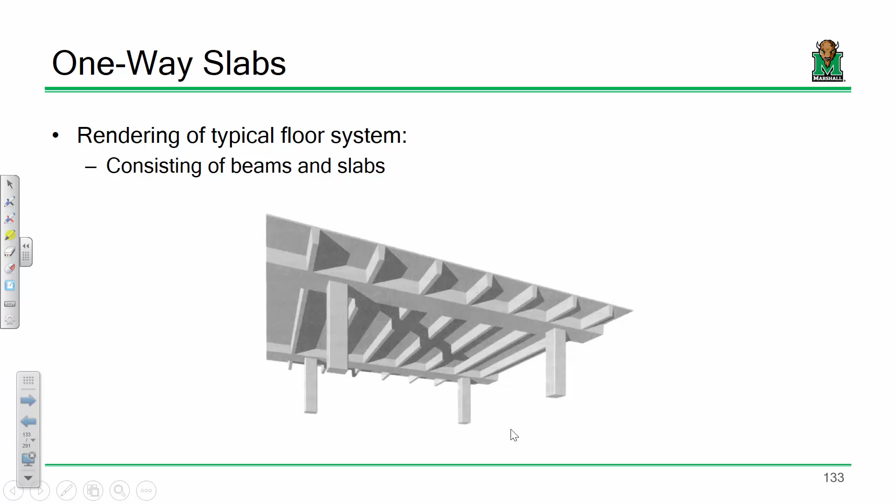Now, I'm sure a question that comes up is, why are you using the word one-way? What do you mean by one-way slab? Well, the slabs we're going to be designing in this class are one-way slabs because they're designed or intended to bend in one direction, that they bend one way. This image here on top would be a perfect example of the assumptions we make for a one-way slab, so it's bending just in this one direction. That's a pretty conservative assumption for design purposes, and that's what a one-way slab is.

A two-way slab bends differently, the mental image I get whenever I think of a two-way slab is almost like how a trampoline would bend, how it kind of bends this way and that way. So you have that bending going on in both directions.

Now, there are advantages to using two-way slabs. Because you're transferring the load in 2 directions as opposed to 1, what you find is that if you design a one-way slab, and I'm just making up these numbers to give you a scale, let's say you design a one-way slab and you find that slab needs to be 12 inches thick.

An equivalent two-way slab might be something like 8 inches thick. You might be able to shave some weight off of that slab, so there are benefits to using two-way slabs. The problem is that two-way slab design is trickier. First off, if you're getting analytical with it, the math gets way more complicated very quickly.

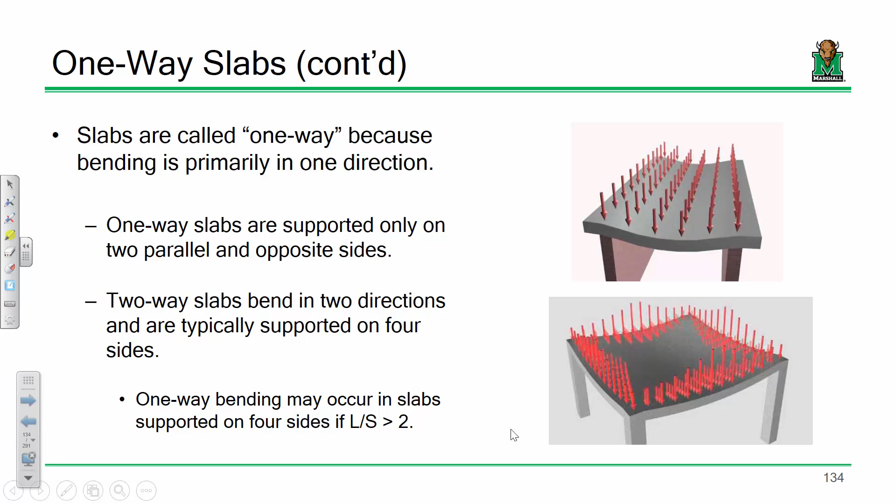This is one of those things where you need to learn how to walk before you can run. You need to learn how to do one-way slab design first before you can tackle more complex issues. So we're going to keep it simple and start with one-way slab design. The way you design a one-way slab is pretty straightforward. Keep in mind a slab is nothing more than a really flat beam that's supported on each end.

So what I've got here on the bottom is an image of a slab. Let's say that slab is sitting on a floor system. So this would be a beam, this would be a beam, and this is the slab on top of that. What we do for design purposes is cut out a small little strip, and for units we usually take a 1 foot wide strip.

We say let's do some math and analysis on this strip and figure out how much reinforcement we need inside it. Then whatever reinforcement we need there, we just repeat that pattern along the entirety of the slab. That's basically the long and short of how we do slab design. We design this little strip, and whatever reinforcement we get, we just repeat that everywhere.

Now there's a couple additional details you need to be aware of. One is that we're actually going to be providing reinforcement in two different directions. What I'm calling our main steel, the steel we're providing for structural purposes, is going to be designed just like we did in our previous example for a known cross-section. The temperature steel, going in the opposite direction, we place not really for structural purposes, but more to prevent cracking from things like day-to-day use, thermal effects, and shrinkage of your concrete.

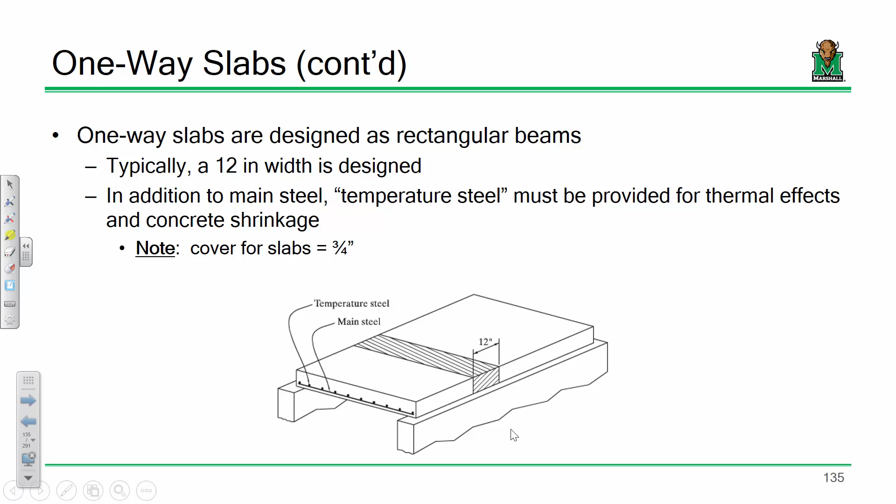Now, the reason we can design a one-way slab in pretty much the exact same fashion as a known cross-section beam is because you know the width, since the width is 12 inches - you're idealizing that 1 foot wide strip. As for the height, we're basically going to be taking the height from ACI minimum.

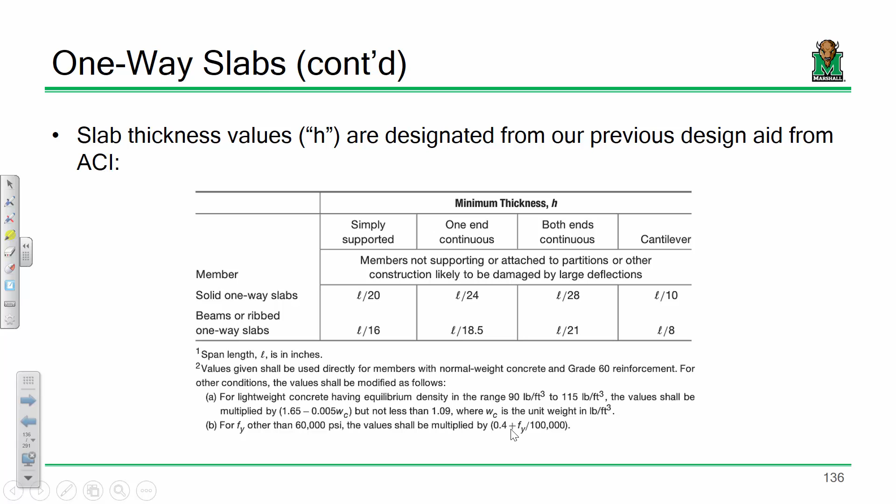You've actually seen this table before - we used it when estimating the weight of a reinforced concrete beam. For instance, if you have a simply supported beam, the minimum height is L/16. If you have a simply supported slab, the minimum height is L/20. That's how we determine the thickness. So if you've got the width and the thickness, you know what the beam looks like, so let's get to design. Here we go.

All right, so here's how you design a one-way slab. First off, we've got to determine the factored moments on the beam. I say beam because you know the width of that beam - it's 12 inches because you're assuming that strip. And the height is just the minimum height we're going to take from ACI. So that one's pretty straightforward.

Again, if you know what the beam looks like, you do not need to assume the self-weight of the beam, because you can determine that from a calculation. You can just calculate it out.

Another point worth mentioning: we are designing a slab here, not a beam. So what you'll find when you do the calcs is that your moments can actually be kind of small, because you're dealing with a really small element and the loads applied over a really small area.

When we did beams, we were getting bending moments like 400 foot-kips, 500 foot-kips. Here we're going to do an example where the bending moment is 5 foot-kips. That's normal for a slab, so don't think that's weird, okay? It's over a really small area. So 3 foot-kips, 4 foot-kips, 5 foot-kips, totally normal.

Next, we are going to assume a phi value and go through and do that. Then we calculate a rho for design purposes. Again, we're not using 0.18 FC prime over Fy, because you don't need to guess rho or pull a value out of thin air. If you know what the beam looks like, you can solve for what rho needs to be.

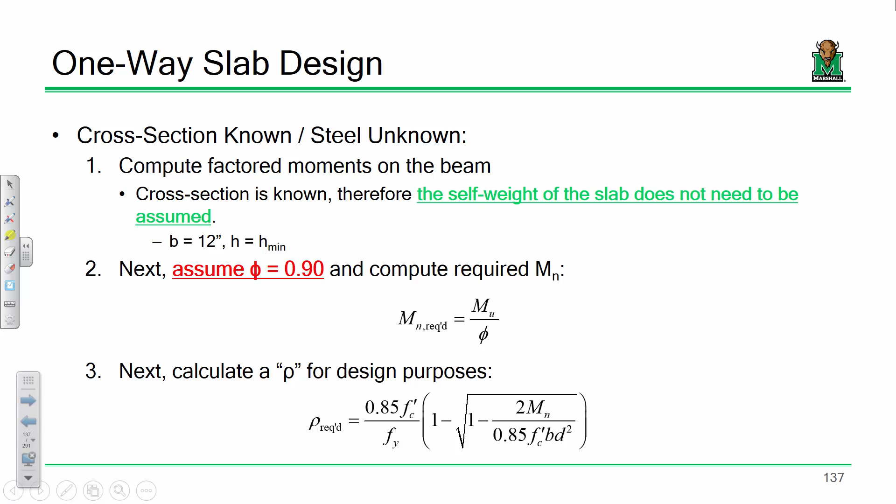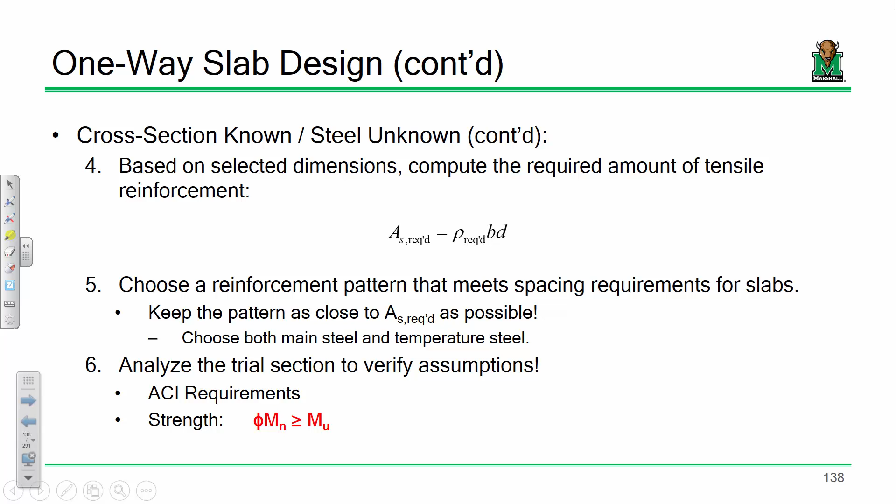Once you've got rho, BD will give you the area required for your steel, and then you choose a reinforcement pattern that meets spacing requirements for slabs, and we'll get to that in a second.

One of the other things I'll point out now - let me find it. If you haven't broken this out yet, I would go ahead and break this out. If you recall, I gave you a reinforced concrete beam design aid and a reinforced concrete slab design aid. This is probably one of the easiest design aids ever to generate in Excel. Everybody in this room could probably do this in about 5 minutes. Let me explain how this works.

Remind me, what is the area of a number 9 rebar? The area of a number 9 is 1 square inch. Okay, so bear with me on this.

If I took a number 9 bar in a slab and spaced it at 12 inches, would you agree that I have 1 square inch per foot? Good. Now, what would happen if I took a number 9 bar and spaced it at 6 inches? What would be the area per foot? 2 square inches per foot, right?

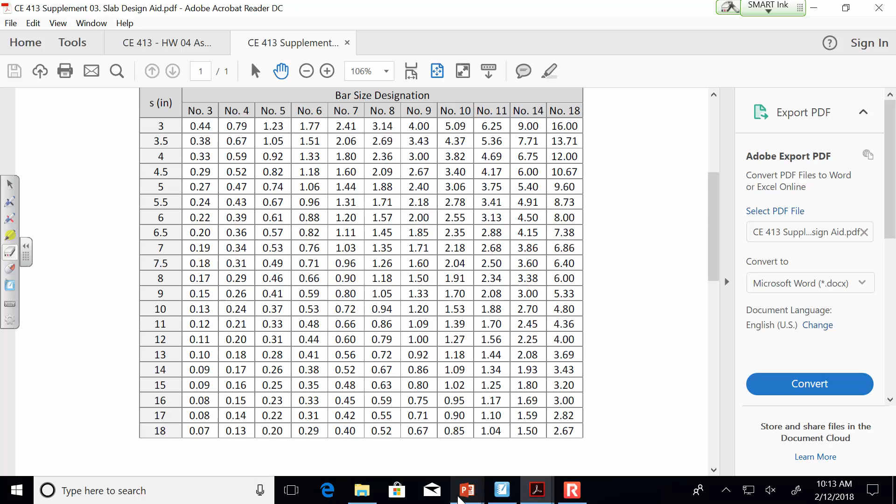All right, don't worry, I think you'll find this is pretty simple. In terms of spacing for our main reinforcement, we just calculate that using our reinforcement ratio, the same pattern we've been doing. Your maximum bar spacing is the lesser of either 18 inches or 3 times h. You calculate 3h and 18, whichever's the smaller value, that's your maximum bar spacing.

The idea is that you're designing a slab - you could probably find a reinforcement pattern that's great, but if you've got rebar that are 5 feet apart, then you've got weak spots in your slab. So your reinforcement has to at least be spread out in some fashion. That'll tell you what your maximum bar spacing is.

Temperature reinforcement's really easy - it's just 0.0018 BH. It's very easy to confuse this: it's H, not D. So when you calculate your main steel, you use rho BD. This is 0.0018 BH, so just be aware of that - that's easy to mess up. Temperature steel is just an empirical relationship.

This is just one of those adages - you go out in the field, do this for 10, 20, 30 years, and you find that this is reasonable, and that's the limit you find in the spec. So 0.0018 BH is your minimum requirement of temperature steel, and the bar spacing is the lesser of either 5H or 18 inches.

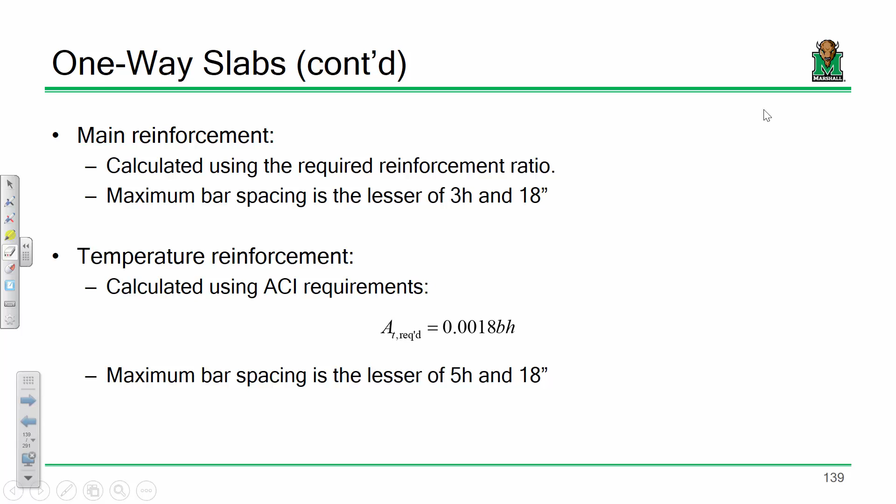All right, so let's design a one-way slab. Now I've got here that the span length is 10 feet, but I want everybody to make sure they have a good conceptualization of what that means. If we're talking about the span length of a slab, it's really how far apart the beams are. If you've got beams 10 feet apart, the slab spans between those beams. Does that make sense? So a slab span length and a beam spacing is the same thing. I just want everybody to conceptualize that.

So we're going to use 4 KSI concrete, 60 KSI steel. You all saw in our beam design example that if you start tweaking your FC prime, it affects your flexural capacity, but not a whole lot, not as much as you would think.

Now, live load, we're putting 200 pounds per square foot on this slab. Do you think that load is reduced or not? Anything over 100 pounds per square foot is non-reducible. So you couldn't reduce it anyways. Another thing to be aware of: even if it is allowed to be reduced, there's another rule that states you can't reduce if your tributary area is so small. We're talking about a slab element that's only so wide and so long, so we wouldn't reduce anyways.

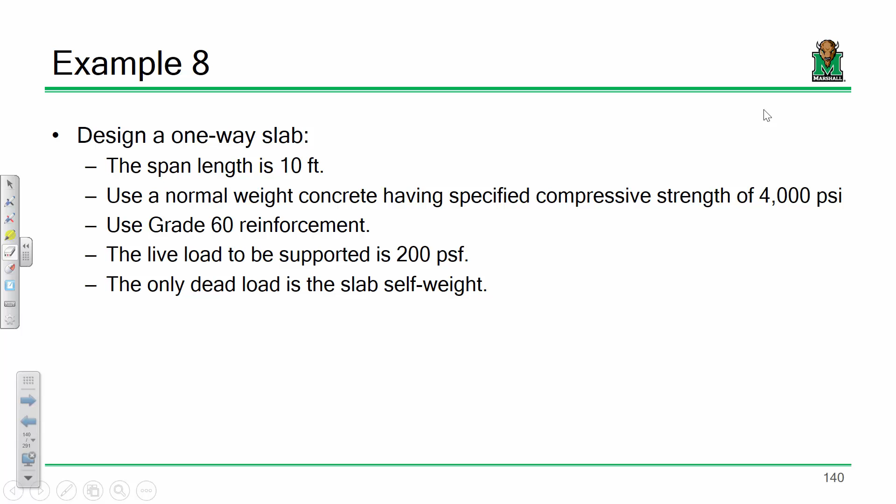Now, the only dead load is the slab self-weight, so there's no superimposed dead load on this. That makes our life a little easier. Okay, so far so good?

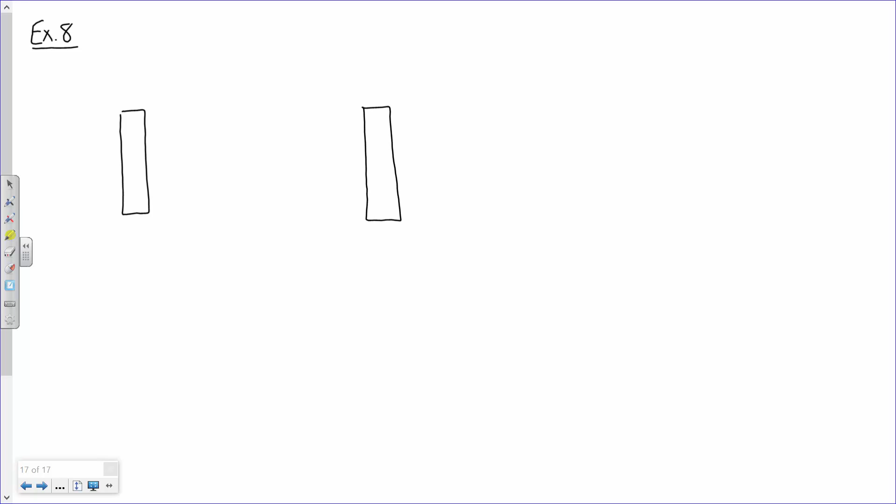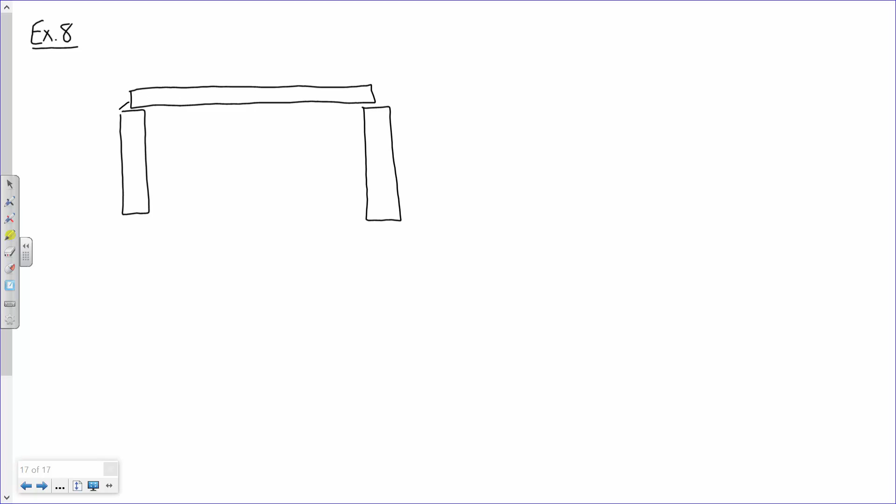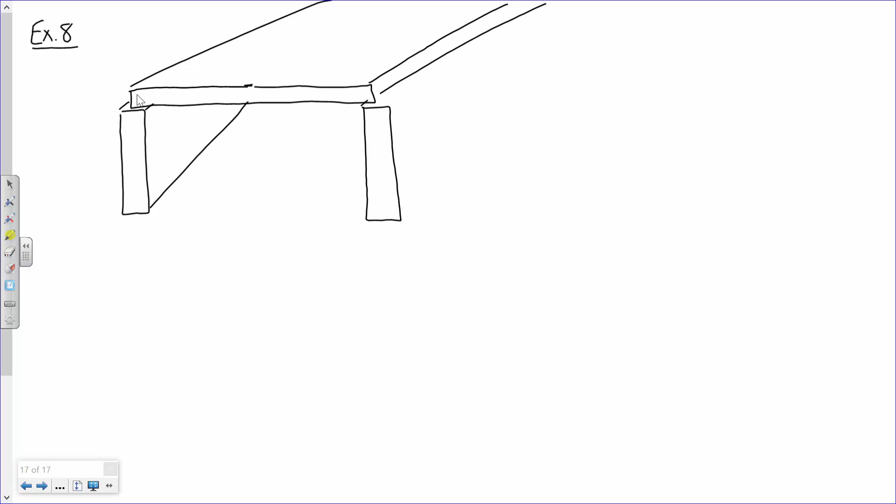Okay, now so just so everybody's clear on this, please bear with me, I'm going to do my best. All right, so we've got a beam, and we've got a slab sort of sitting on top of that beam, about like that. Testing my 3D art skills a bit. Does that make sense? It's a little messed up, but it'll be all right.

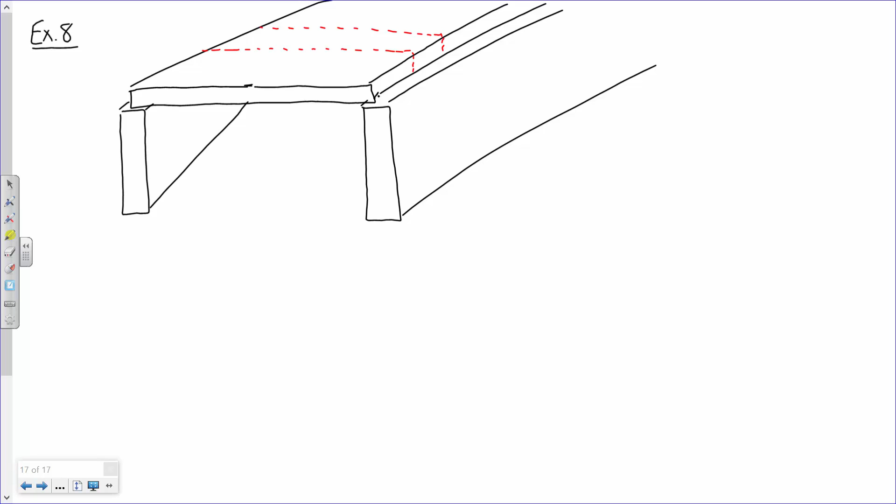Okay, so keep in mind, we're assuming that this slab goes on forever. But what I'm going to do is isolate a little strip, look something like this. So I'm going to look at this cross section right here, and design that as if it was a beam. Now this beam is 10 foot long, and that's what I was meaning when I was saying that a slab span length is basically a beam spacing.

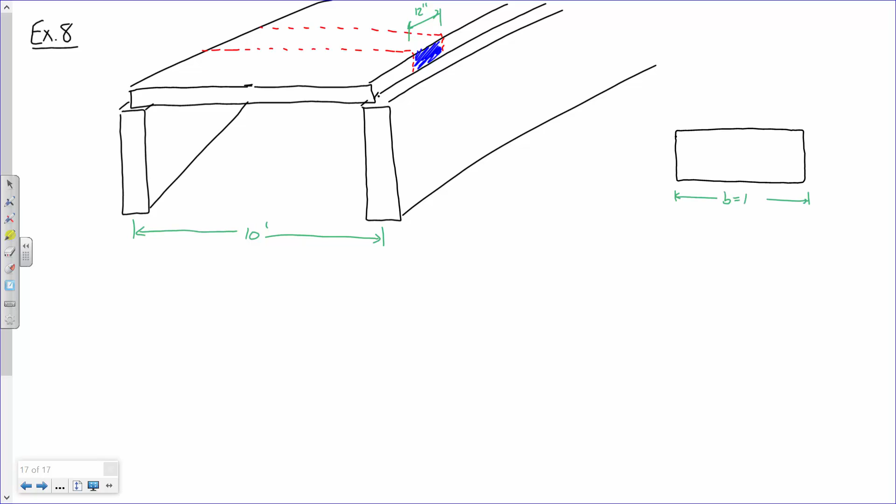Make sense? Okay, now when I do this design, remember this dimension right here, that's the 12 inches. So if I look at that cross section, what I've got going on is this - if I zoom in on that blue shaded area. So here's my beam. And this dimension right here, that dimension is B, and that's 12 inches.

I'm going to have some steel in here. I don't really know what's going on with that steel just yet, but I know a couple things. I know that this dimension right here is D, and this dimension right here - bless you - I know that that dimension is H. Does that make sense? Now we don't know what sizes and spacing we're using for that steel reinforcement yet. Just be aware of the dimensions.

Now let me explain this. Keep in mind, we still got that third dimension, right? So this dimension here, we're talking about along the span length or along the beam spacing. Now that rebar that we're designing, it goes along the span. That is the main steel.

However, we are also going to provide steel in this direction - hold on now, we're also going to provide steel in that direction. So that is our temperature steel. I want everybody to understand the orientation difference. Main steel goes along the span length or along the beam spacing. Temperature steel goes in the opposite direction. That temperature steel is not intended to resist load - it's intended to prevent cracking from thermal expansion, from shrinkage, from day-to-day use, things like that. Sound good?

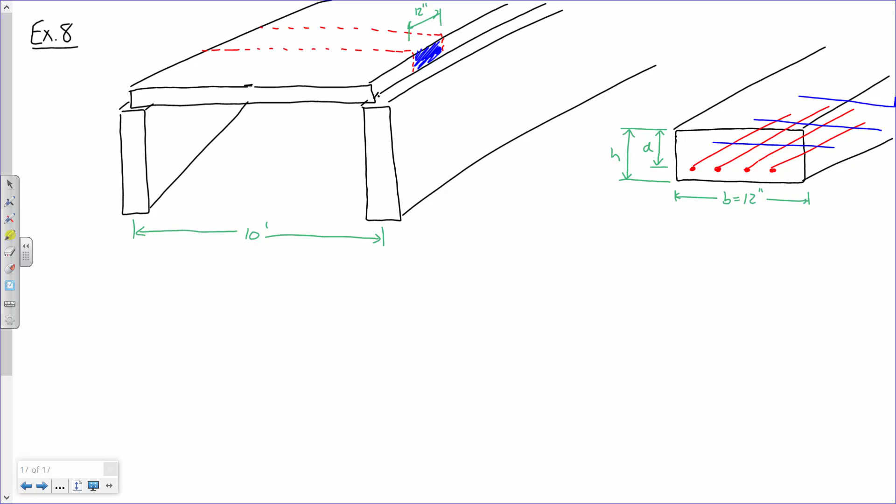Now, if you understand that, then a couple things. Remember, for cover, here's another thing I'll write: for cover, we're going to assume that H equals D plus 1 inches.

Now, if you want a visual explanation for that, here's the idea. Here's your slab, here's your bar. This dimension right here is my cover requirement, that's my 3/4 of an inch, but D goes from the top to the center of that bar. So to keep things simple, that goes up a little bit. If we just say D plus 1 inch, that'll account for most commonly used bars for slabs anyways. That's a pretty common, straightforward approach. Does that make sense?

Now, do we have to worry about cover to the side of it too? That's a good question. I mean, yeah, but you also have to understand we're just basically determining a general bar spacing. Whatever pattern we pick is going to go on forever. This 12-inch strip was just analytical, it doesn't really exist. So that's going to go on forever. You do have to worry about cover to the side. You can just take that first bar and space it in enough. But it's usually not that big of a deal. That's easy to get around. That's a good question. Any other questions?

Is there not Chrome on these computers? Who uses Microsoft Edge?

Yeah, I see what you're saying, and yeah, you would think, okay, there's some plastic there. We just sort of conservatively neglect that.

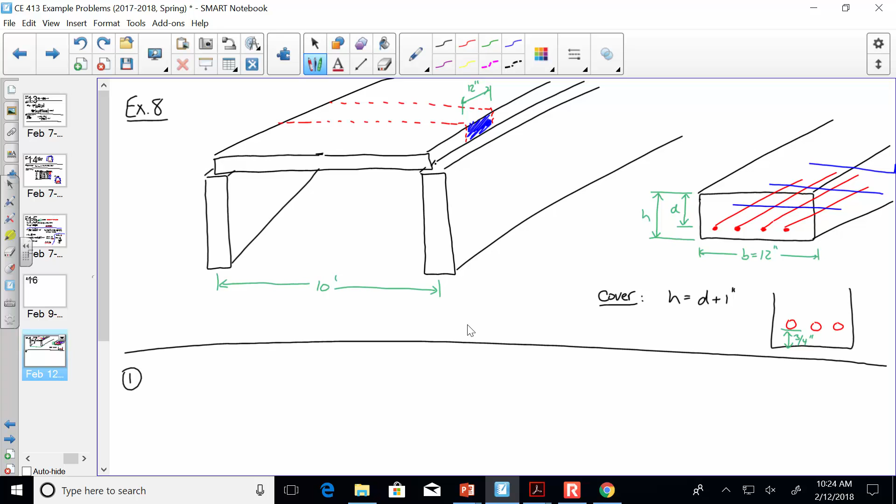Can you go back to the example? Yes, all right, so we're analyzing a figurative strip going this way. We orientate this as the main, this is the temperature steel, based on that strip. Now, if we were to do a strip going the other way, would that change the main and the temperature directions? Well, yes, it would, but you'd also have to have a beam that way too. So your main is going against the direction of your beam.

In our assumption, let me answer that two ways. We're assuming only one-way slab design because we're assuming our main supporting elements are going this way, which is usually the case because that's the way the beams are facing. If you wanted to assume the opposite direction, that's fine, but you'd have to have beams there. Otherwise, you'd have a beam floating in space and there wouldn't be anything there. That's point one. Point two, let me also be clear: one-way slab design is conservative. You end up getting probably more reinforcement than you need. So your temperature steel goes in line with the direction of your beam. Yes.

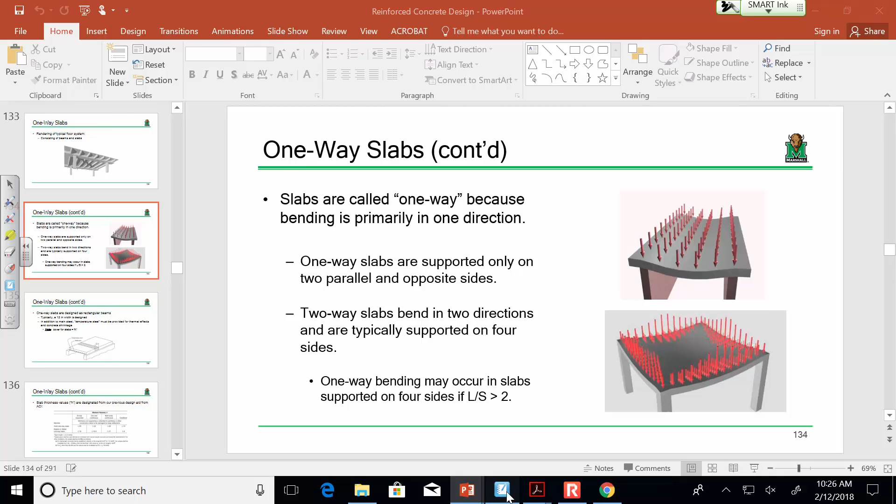Any other questions? All right, okay, let's get some math done. So, step one is to compute our factored moments. Okay?

Okay, compute factored moments. So help me out, what is the width of this beam going to be, quote unquote? 12 inches. What is the height?

But we don't know what your minimum requirement is, minimum height. Does anybody have that? What is the minimum height for a simply supported slab? L over 20.

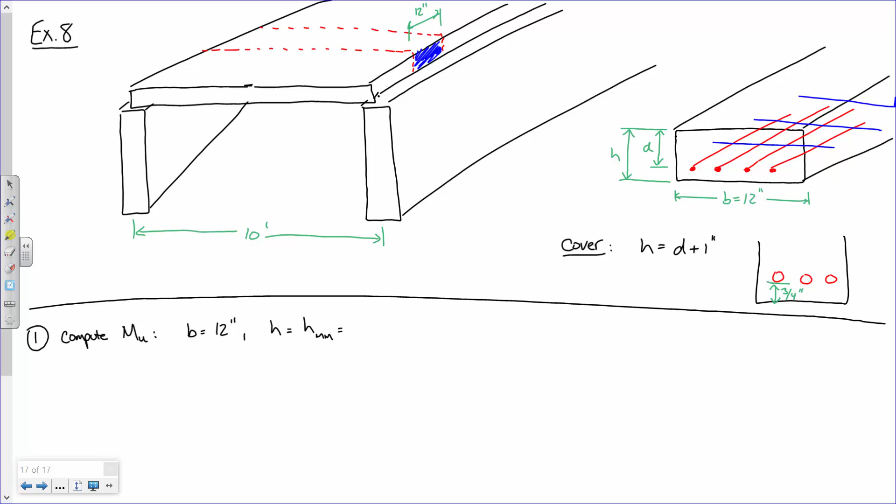So what is that? Is that just 10 over 20? No, units - this is 10 feet over 20, so you need to convert that. 12 inches per foot, so it's half a foot, or it's 6 inches. So right off the bat, we've already determined how thick the slab's going to be - it's a 6-inch thick slab.

Okay, so that's pretty easy. Is our D 5 inches? So yeah, D is 5 inches. So if you want, you can go ahead and write that here, although that has absolutely no bearing on the self-weight.

All right, now help me out, how do we determine the self-weight? How have we been determining the self-weight all along? There we go, gamma BH - so the unit weight of the concrete times BH.

So we weren't given a unit weight in this problem, so what should you assume? What's conservative? There we go. So I'm going to say, in kips, 0.15 kip per cubic foot.

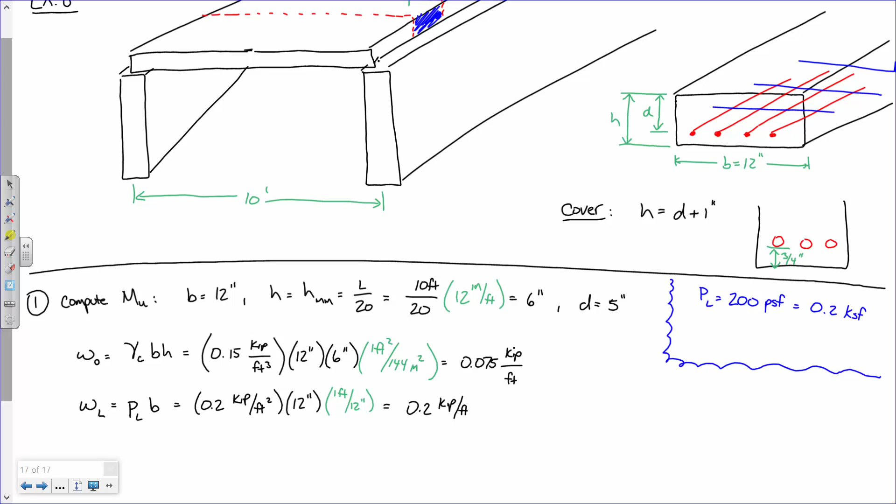All right, sound good? Okay, I'm going to do something a little... okay, I'm doing it for a reason, okay? You're going to go, why are you doing this? Bear with me, trust me, I know what I'm doing.

Okay, watch this. All right, so this is how we did this in a previous example. We said WU is 1.2 W naught plus 1.6 WL. So we factored our load. And just tell me what that is - chug that out.

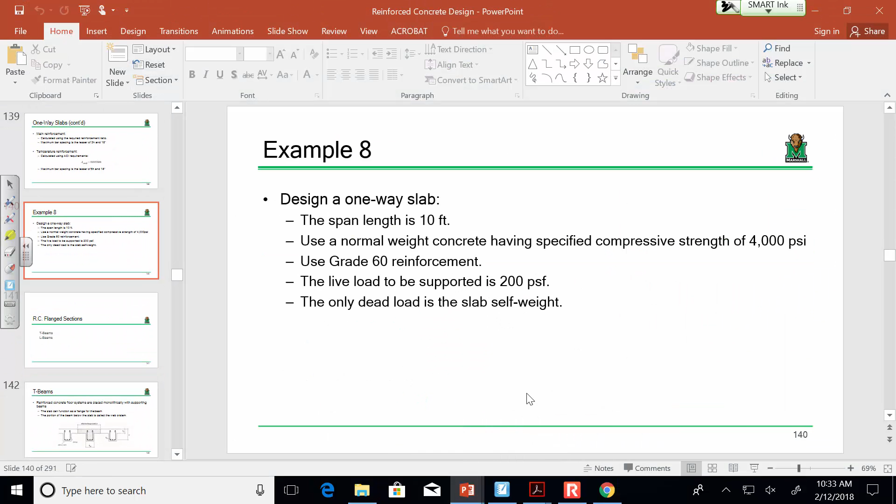That's good, yes we did. We had a superimposed dead load, but for this example, the only dead load is the slab self-weight. So if you have another one, you would have a WD. You're exactly right.

0.41 kips per foot. And then what's MU? WU L squared over 8. What's L? Which is 10, right? Let me go ahead and write that one out. 0.41 kip per foot times 10 foot squared over 8. What does that come out to be? 5.125 foot kips, right? Do I have a second on that?

All right, everybody with me so far? Now everybody sort of watch up here and pay attention to this, because this is kind of important for your homework assignment. I want you all to pay attention to this. This is method 1. Just watch with me. Watch method 2. And it's going to seem silly, but you'll see why I'm doing this here in a second.

Let's compute a dead load moment. And let's compute a live load moment. All right, somebody help me out with each of these. So what's the dead and what's the live?

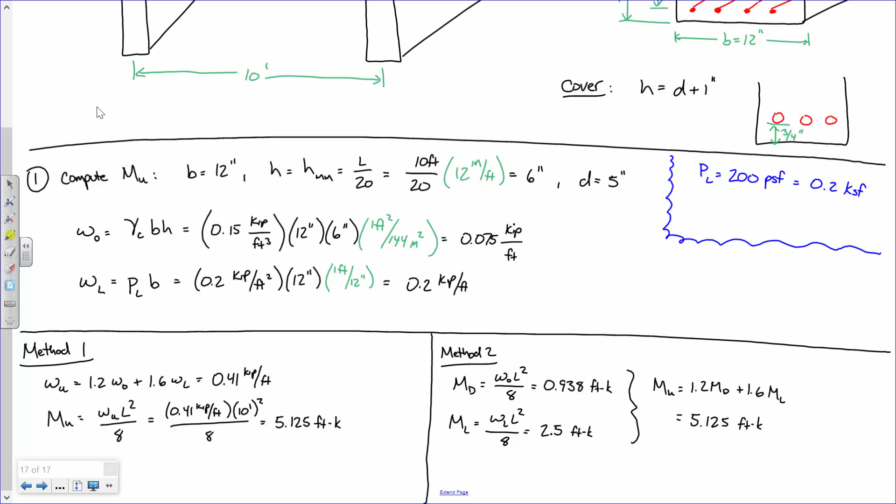Make sense? Does this make sense though? Any questions? All right. Okay. So, oh, whoops. Okay, so that's step 1. Do you all need any more room or any more time? All right.

What's step 2? If we have MU, what's step 2? MN. Compute required MN. And what do we have to do for that computation?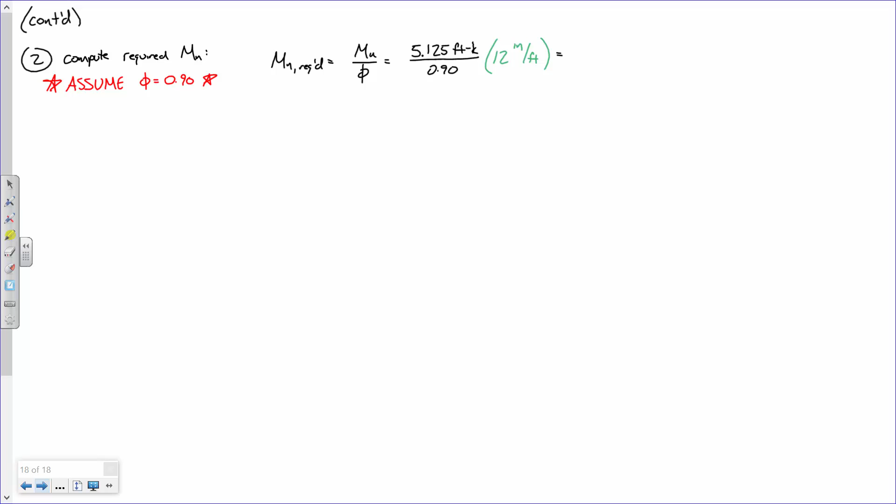And then we are going to adjust that. We'll go ahead and do that right now and convert it to inch kips. So what does that come out to be? Somebody over here. Somebody over here. Anybody got an answer? There we go. 68.33 inch kips. And again, that's a lot smaller than what we had on the beam problems. Like we were given like 6,800 inch kips.

Again, this is a really tiny element with really tiny moments, so it makes sense. So step 3, compute required row. Okay. So what do we got? We got row required. Remember, not the 0.18 FC prime over Fy because we know what the beam looks like.

0.85 FC prime over Fy. 1 minus square root 1 minus 0.85, bless you, BD squared, and 2 MN required. So let's see if I can fit that all in one line. So 0.85 4 KSI, 60 KSI. Remember the 1 minus square root 1 minus, that shows up twice. So 0.85 times 4 KSI times 12 inches times what is D? 5. There you go. 5 inches squared. Don't forget the squared. And then 2 and 68.33 inch kips. All right.

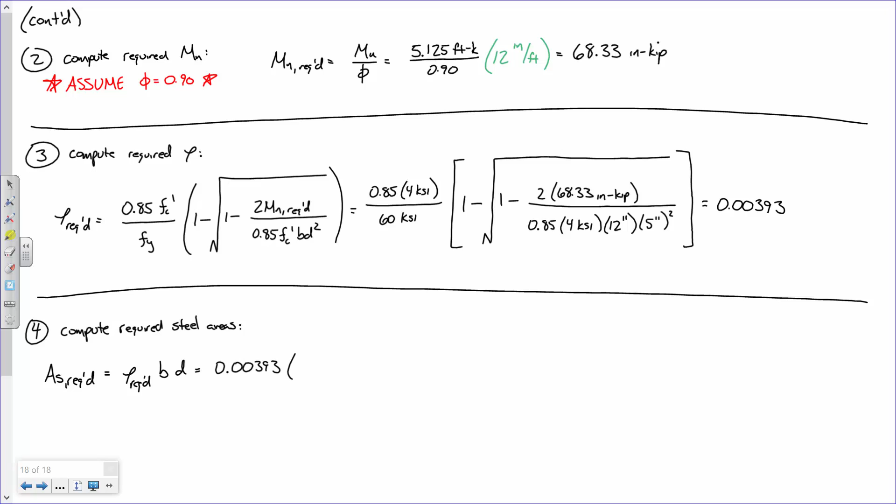4, once you've got that, compute required steel areas. Okay, so watch this. Bless you. So AS required is row BD, whereas the temperature steel is 0.0018 BH. That's a very easy mistake to make, so just pay attention to that. So this is 0.00393, and that's 12 inches, 5 inches, and then we'll calculate that, and then AT required is

0.0018 BH. So 0.0018, 12 inches, and then 6 inches. Okay? Make sure you pay attention to that. So that's not a typo. That's correct, that those two dimensions are different. Okay? So what is the top one?

0.236. Do I have a second on that? Okay, so watch this. So that is 0.236. Now here's the thing, that's square inches of steel, but that's per foot of slab. And this bottom one comes out to be what? 0.1296, so maybe like 0.130 inches squared per foot of slab.

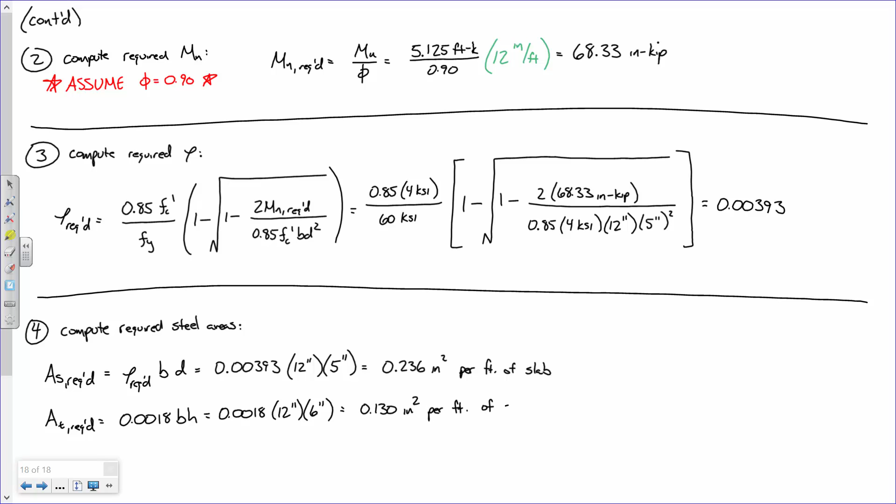What do you think? Any questions? All right.

The only thing left to do is to actually pick some steel. So we actually have to select some reinforcement.

Now, before we do that, we need to make sure that whatever pattern of reinforcement we pick makes sense. What I mean by that is bar spacing. If you recall, main reinforcement has a maximum bar spacing of the lesser of 3H and 18 inches. And for temperature, it's 5H and 18 inches.

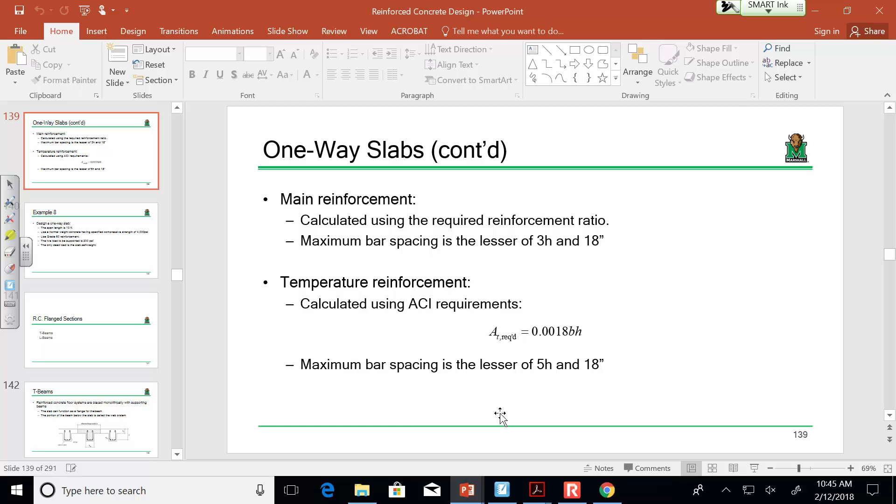The way we do that computationally is we say, for main steel, we have an S max, which is the minimum of 3H and 18 inches. Now, this is sort of serendipitous because what happens is the minimum of 3 times 6 inches and 18 is 18 inches, because 3 times 6 is 18.

Now, for the temperature steel, we just need to make sure that S max is the minimum of 5H and 18 inches, which is, let's do better than that, the minimum of 5 times 6 inches, or 18, which is 18. So as long as our bar spacing that we pick is less than 18, we're good.

Okay, so let's check that out. I'm going to pull out my slab design aid. Let's check this out. Oh, we're doing great on time. Okay, so let's start out with the main steel.